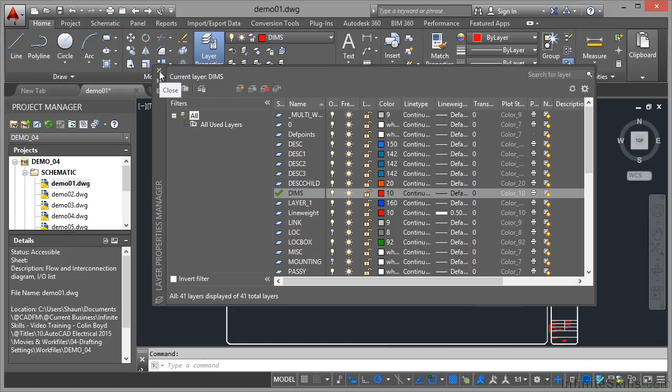Quite often when working on a complicated AutoCAD electrical drawing, you need to isolate objects or hide objects on a drawing. Now you can do this using your layers if you want to. In your layer properties panel, I can freeze layers or switch layers on and off. Now that's great if you know what layer the object is on that you want to either hide or isolate. So let me just close that layer properties manager.

We're in the drawing demo 01 again, in the project demo 04 in the AutoCAD Electrical Project Manager. Now what I'm going to do is zoom in on this area here. We've got a conveyor motor, a hydraulic motor, and an indexing motor. I'll zoom in. We've got some text highlighting the tags on each of the motors, and then we've just got some polylines representing those motors on a drawing. What we've done is we've brought the tags in from the schematic drawings in the AutoCAD electrical project.

Now it may be that I want to work on those tags and update them, but I want to isolate them perhaps or hide objects around them. If I want to isolate that particular tag there, what I would do is I select it and then isolate it, and everything else around it in the drawing turns off.

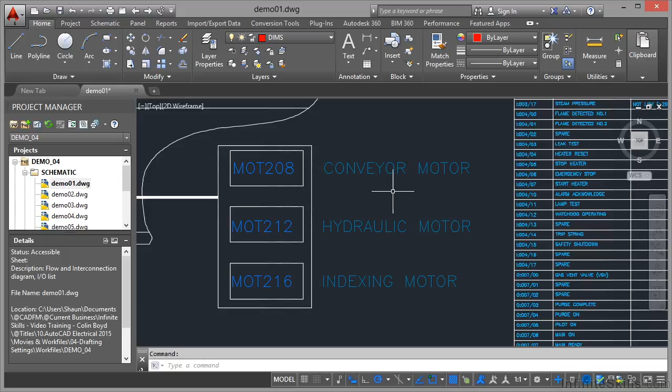I'm just going to come back a notch on the wheel there on the mouse. So I'll select those three objects there like so. I then right click on the mouse and I isolate here. Now I'm going to isolate those objects. As soon as I do that, everything else disappears. Can you see that? That's the only thing in the drawing, and it just allows you to have clarity to work on those objects.

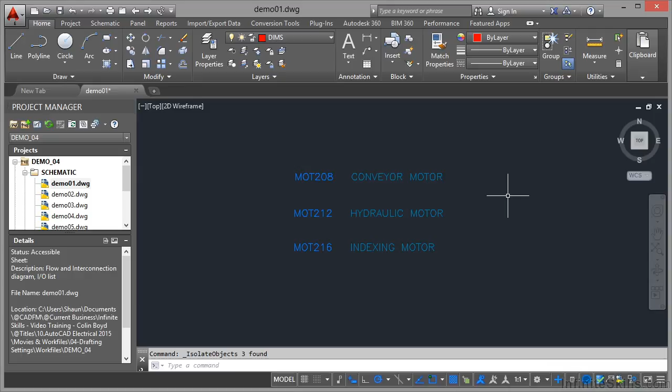It's very easy to get everything back. You just right click, isolate on the shortcut menu again, and end the object isolation. Everything comes back. Very quick, very easy.

You can also do that down here on the status bar. Isolate objects, hide objects. You can do it down there as well on that little menu. It's actually a little bit quicker, I find, to use the right hand mouse button shortcut menu though.

Now I've isolated. What about hiding objects? I might want to work on the rectangles here. And instead of the text being useful this time, it's in the way. So what I'll do is I'll actually hide them this time. I'll select them, just put a little selection around like so, and then I right click again, isolate, and I hide the objects. This time allowing me to edit the rectangles, and then I right click again, isolate, and end object isolation, brings them back again.

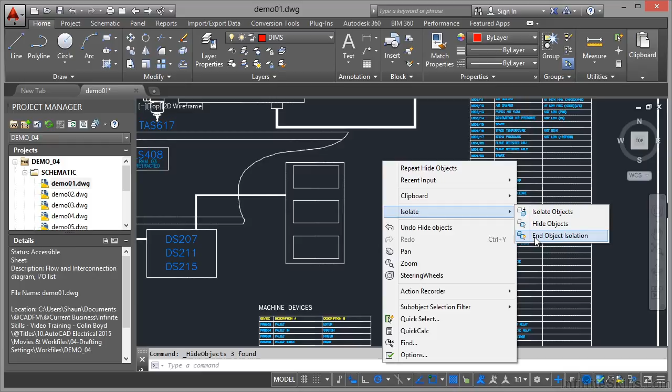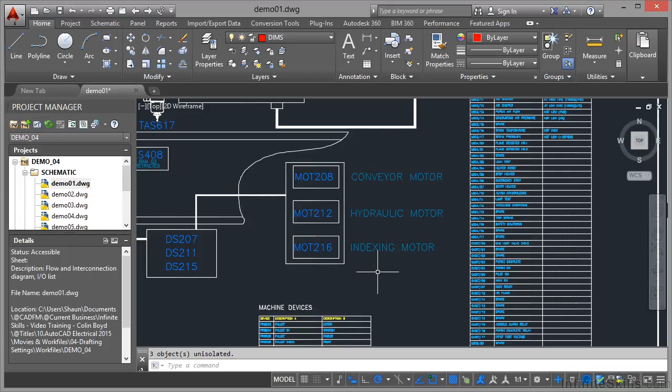It's that quick and it's that easy. That isolate command and also hide command, combined, works very, very well on complicated AutoCAD electrical drawings. Use it, it's a great tool. Saves you having to mess around with layers, freezing, thawing, moving things, copying things. All you've got to do is isolate or hide. It's very quick and it's very easy. Use it. It makes you a lot more productive and a lot more effective when you're using AutoCAD electrical.